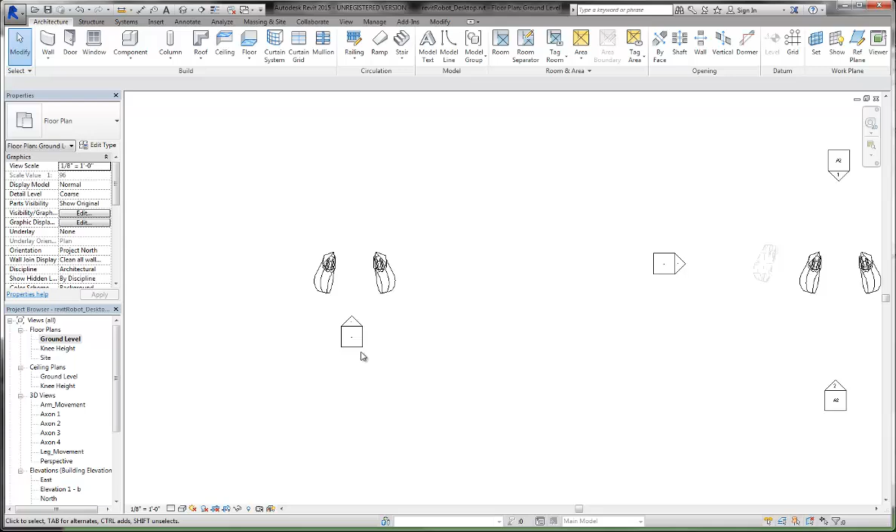Okay, so the first thing I'm going to show you is I dropped in and set up a new elevation view. The way that you do that is you just go to View, Elevation, create a new elevation, and then it'll enable you to come in here and just drop that in. And you'll automatically see that populate.

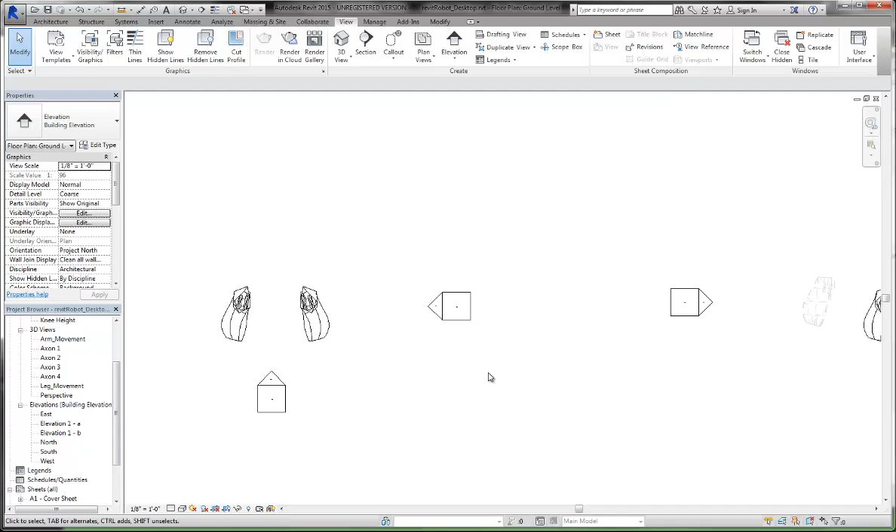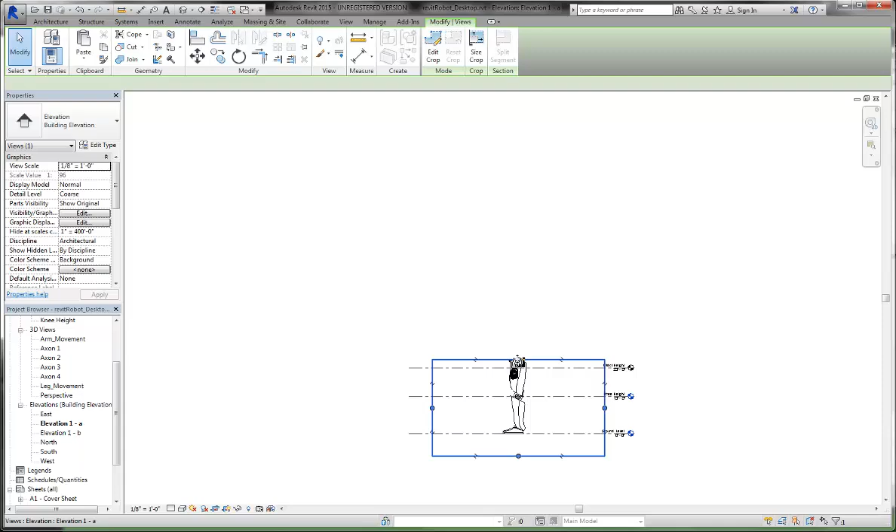If it doesn't give you the view that you want, if you select the square box, you can toggle on and off the views that you want with that check mark. So we come over here, we can double click. If I hit Control Tab to cycle back, you can see that the clipping plane on this doesn't actually show anything in the robot. And so if we come over here and double click, you can see that we see the robot here, and we can pull that up.

And I'll go through and set up our annotations here, and we're going to go ahead and actually dimension this out. Okay, so if I select this, I'm going to just pull these back so that way we can free this up for our dimensioning tools.

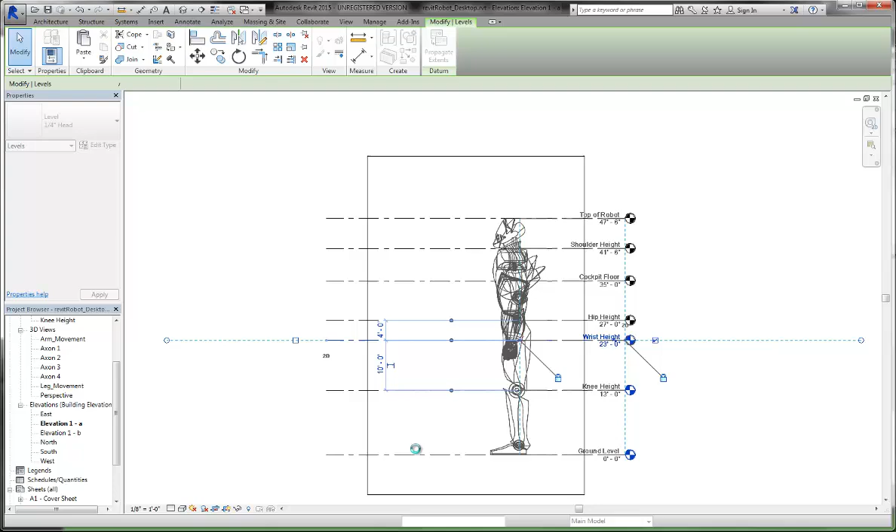Alright, so I've gone through and created levels. These guys are free and independent, so I just eyeballed this. You can see I'm close, but 47 feet 6 inches gets us in the range of where we want. We have the hip height, the wrist height, knee height. You guys can go through and annotate whatever you think is actually relevant to your particular robot here.

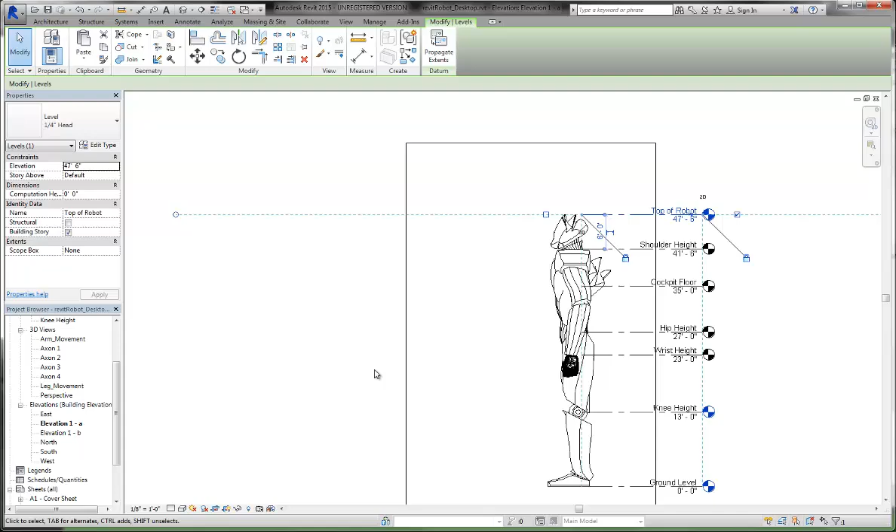So what we'll be able to do here is we'll be able to take some elevations, but then we're also going to do some annotations on this as well. So I'm going to go ahead and go in here. Because I have these reference guys, I can use my annotate aligned dimensions, and I'm going to dimension from the ground level to the top of the robot. And then from there, I'm going to dimension each one of these guys in between.

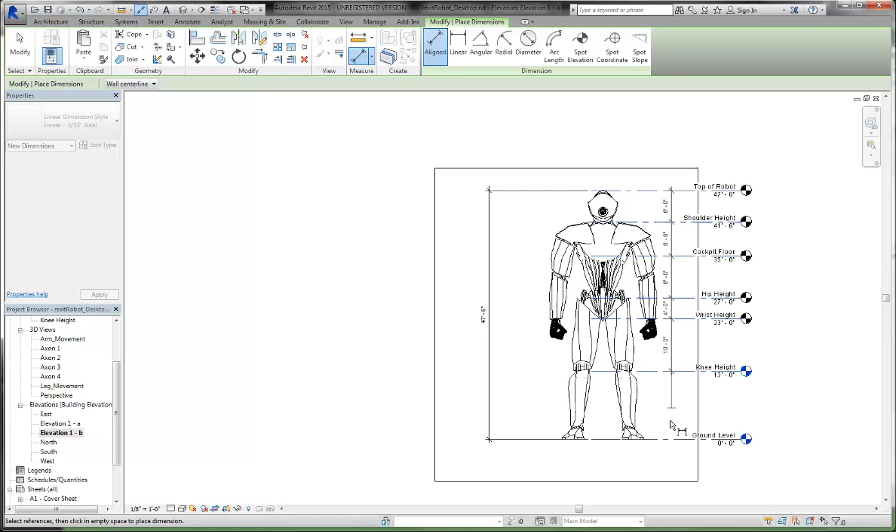This is going to be how you properly annotate and dimension out buildings. You always have the longest dimension and then any smaller dimensions nested inside that. Okay, so that'll give us a nice drawing. The other thing we want to do is we probably want to dimension the top.

And for that, we're going to misuse the grid tools. So I'm going to use a grid, and I'm just going to go ahead and drop that in. Click and then tab. And then if I select this in here, I'm going to toggle this switch on to create the number there, and then toggle this switch off. And then I'm going to go ahead and just set the shoulder width, and then use CO.

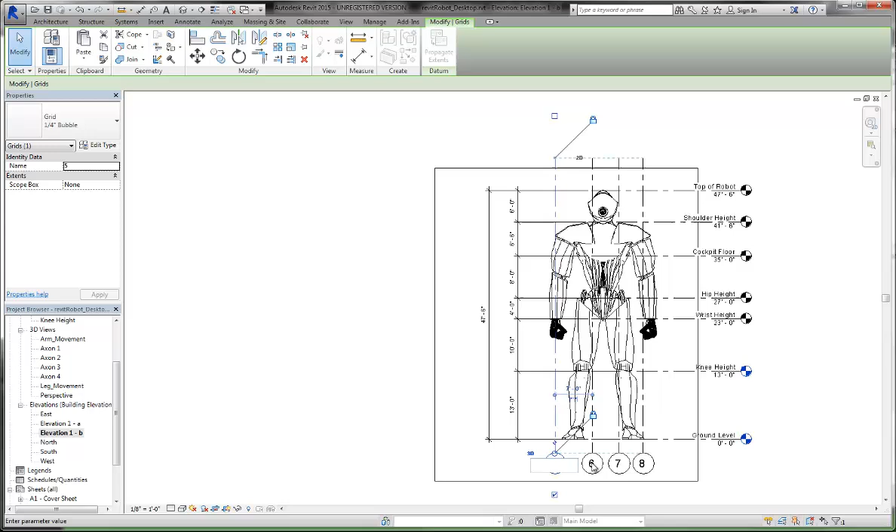CO, one, or we'll call this A, B — I'll just turn on caps lock so I don't have to shift — C, and D. Alright, and then we can come in here and drag those into the appropriate position.

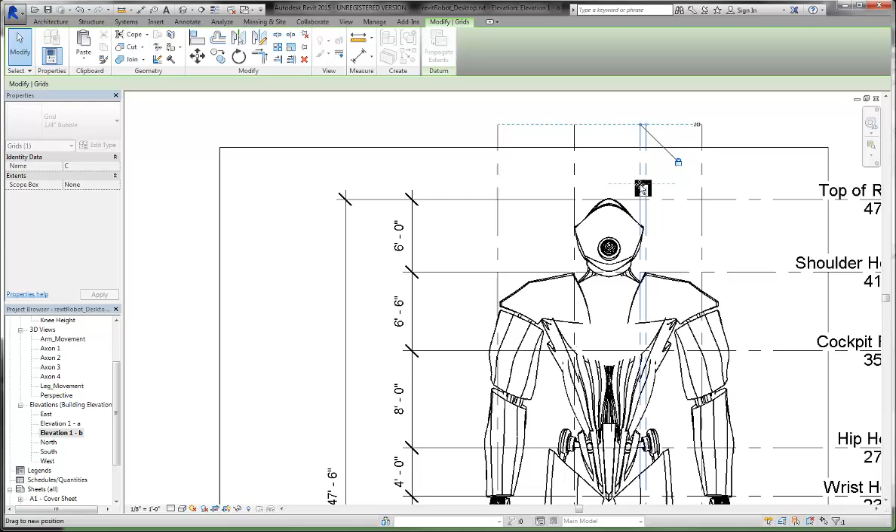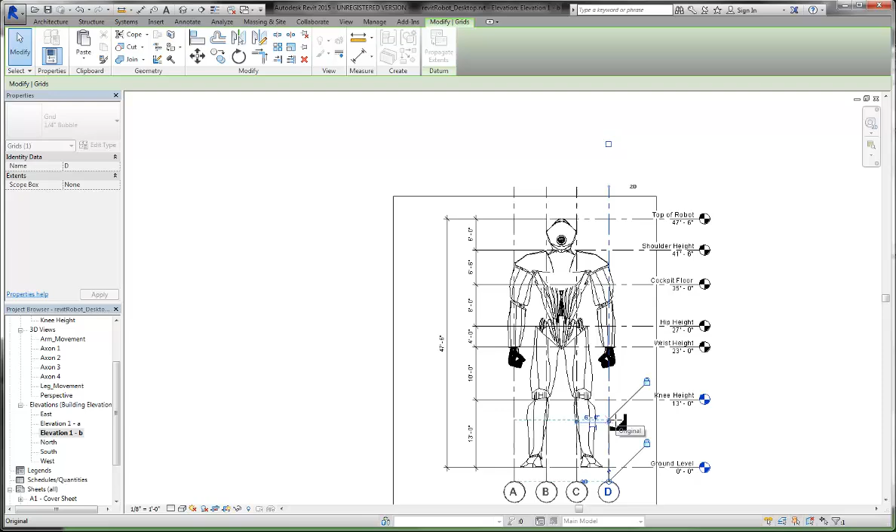Alright, if we select one of these, we should be able to edit how those projections work. This is what you'd use if you were developing a floor plan showing how these particular features would be rigged up, or if you were setting up a grid for a column grid or something like that. Then we're going to go ahead and also do an annotation aligned dimension.

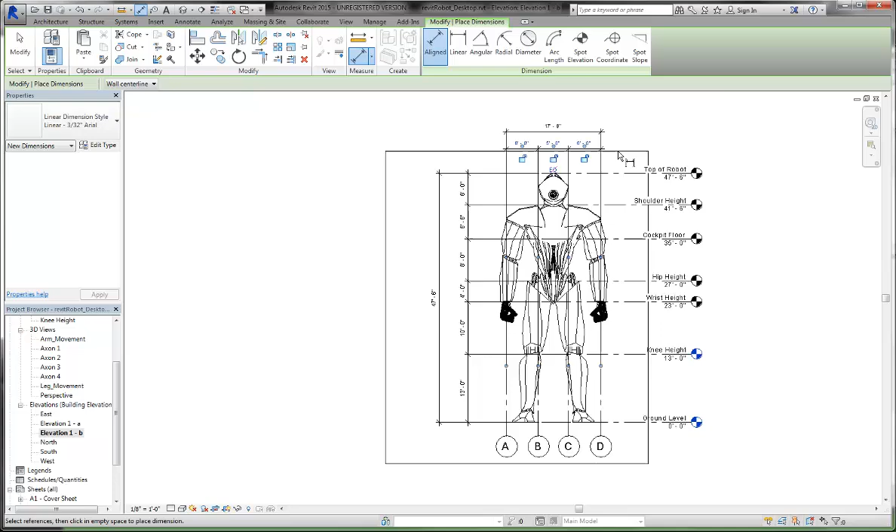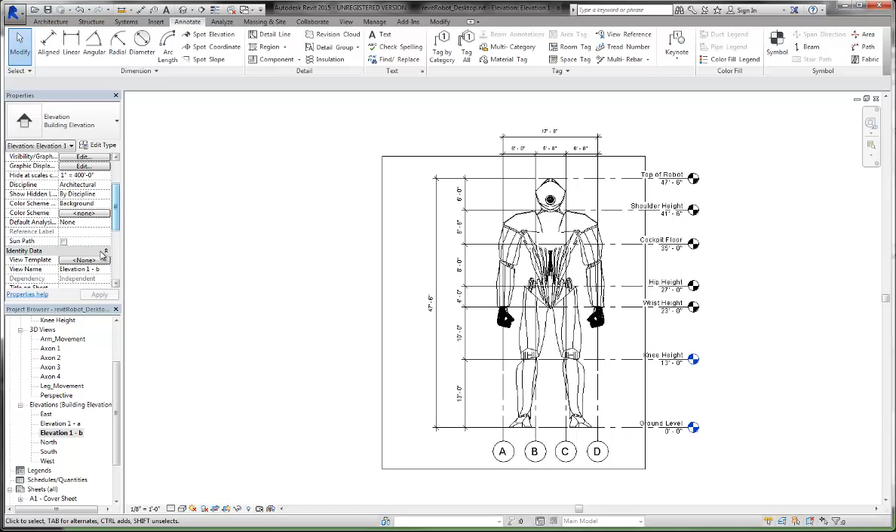Show the shoulder width. So that's how you guys are going to start to set up and dimension out your robot here. Now obviously we don't have any view templates set up for this, and that's making things look a little shabby, so let's go ahead and set up a view template for this guy so we can get these things to look nice.

Let's just see what this does. We apply. Okay, so basically an architectural elevation is the default. Let's go ahead and duplicate that. Robot, turn on caps lock now, robot elevations.

Okay, so we're going to go to annotations, and let's just select all the annotations. I'm going to set those to halftone. Model categories, let's see here. Links, walls, notes.

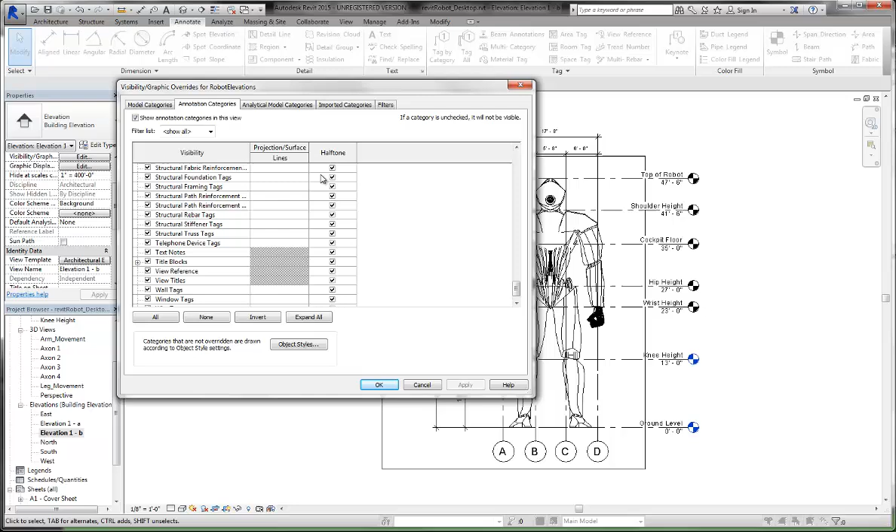I'm not sure why. Oh, okay, we apply that, there you go. Things will start to update, so we can start to see that punctuate itself. Let's go to model display, smooth lines, let's turn on the silhouette, let's go wide, apply. So that's going to beef up our drawing there.

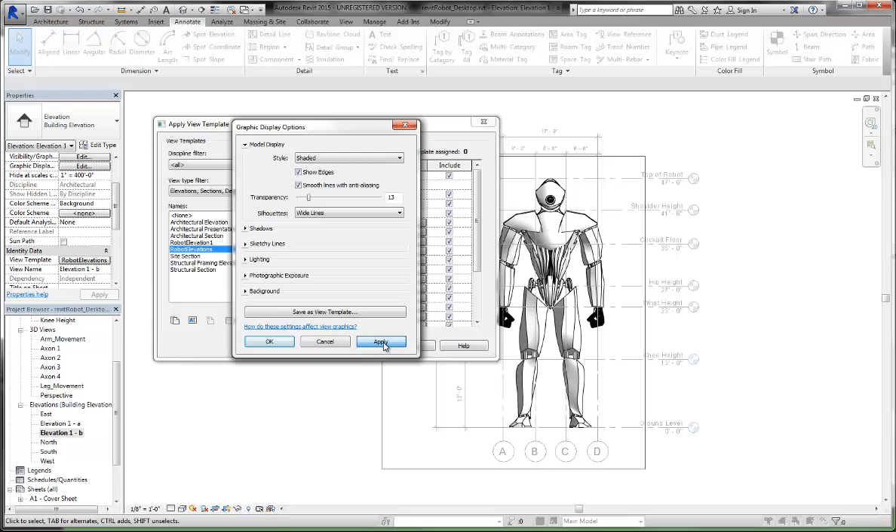Let's go ahead and shade this so we can see that, and I'm going to go ahead and just increase the transparency slightly so we can see through. Okay, I already did the anti-aliasing. Shadows, we can come in here - it doesn't look right, oh, because we're in elevation. So we'll go ahead and hit OK.

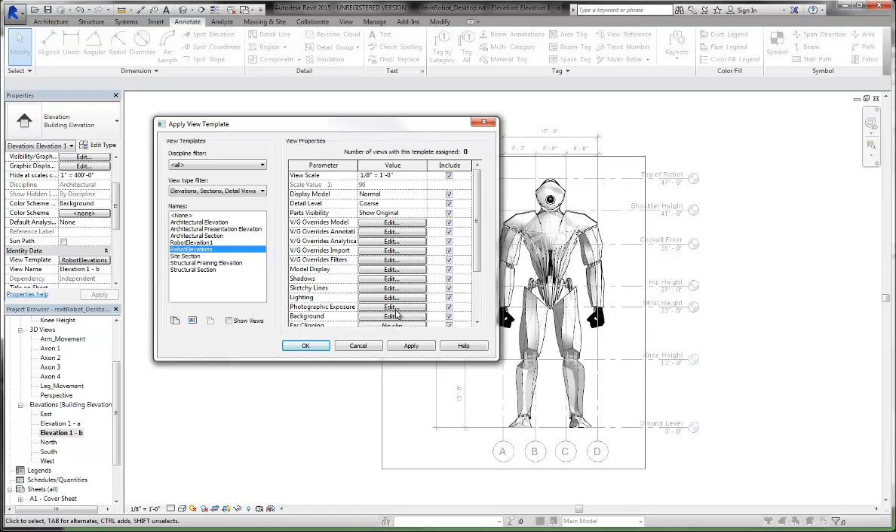Let's see here if I can think of anything else. Nope, I think that's it. So we go ahead and hit OK, and that will rig up our elevation. Then we can come down here and turn off the crop region view, so that would be a nice drawing for us to go ahead and place in.

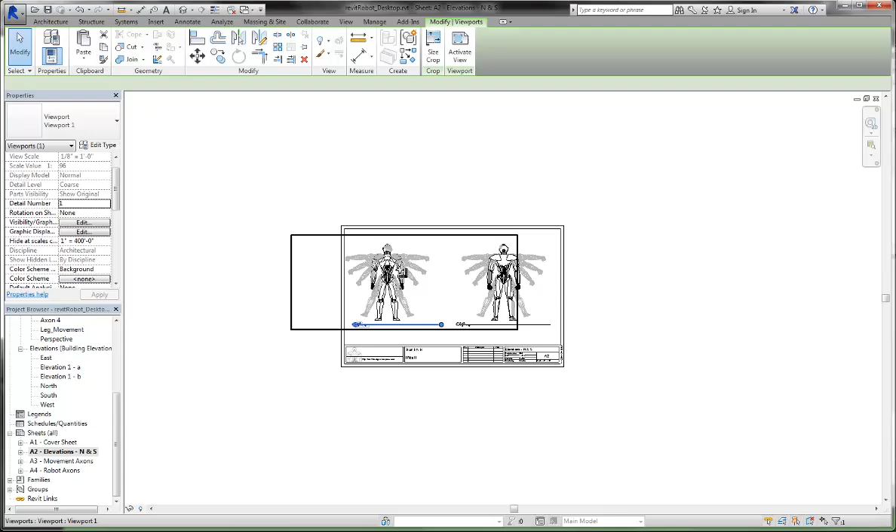So we have this drawing now, and I'm going to go ahead and just move this over, and I'm going to rename this. Vitruvian elevations, north and south.

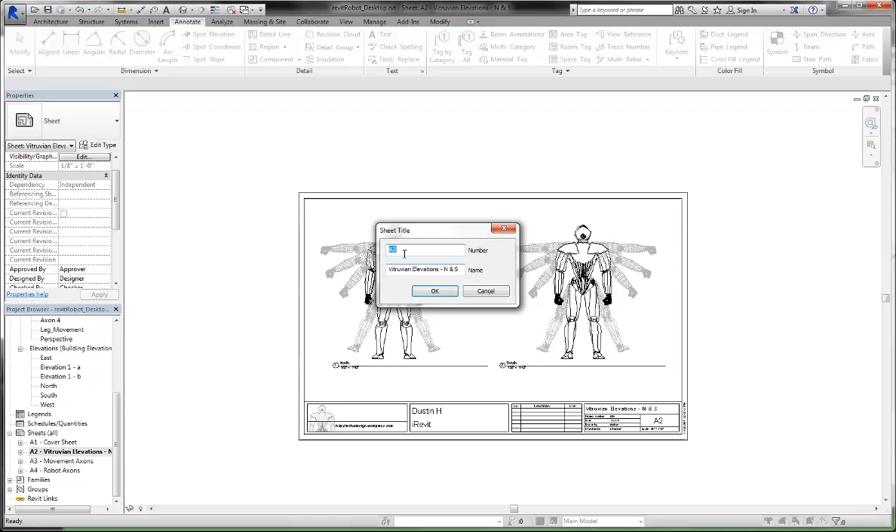Alright, and actually let's call this 2.2 sheet. Okay, let's rename this 2.1 elevations.

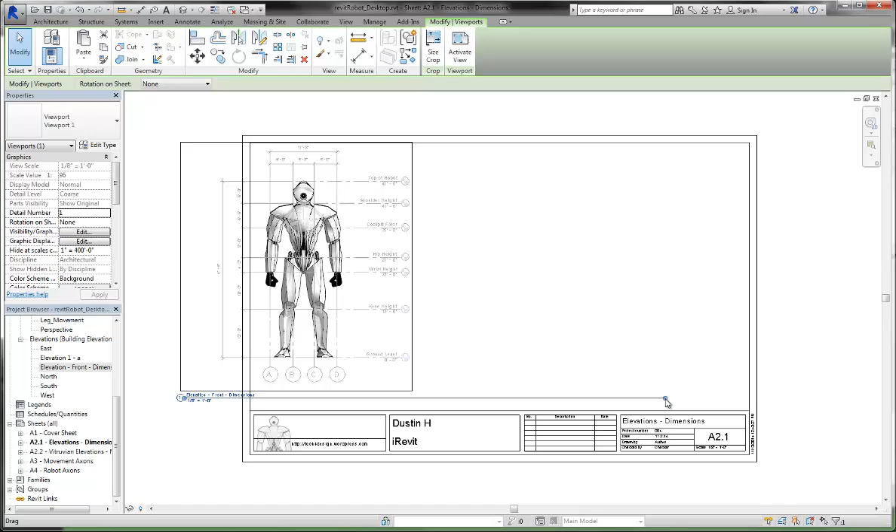So if we go over here now, let's rename this view. Alright, and then we can come over here and pull this over.

Alright, and let's do our other elevation here. Let's rename this elevation side.

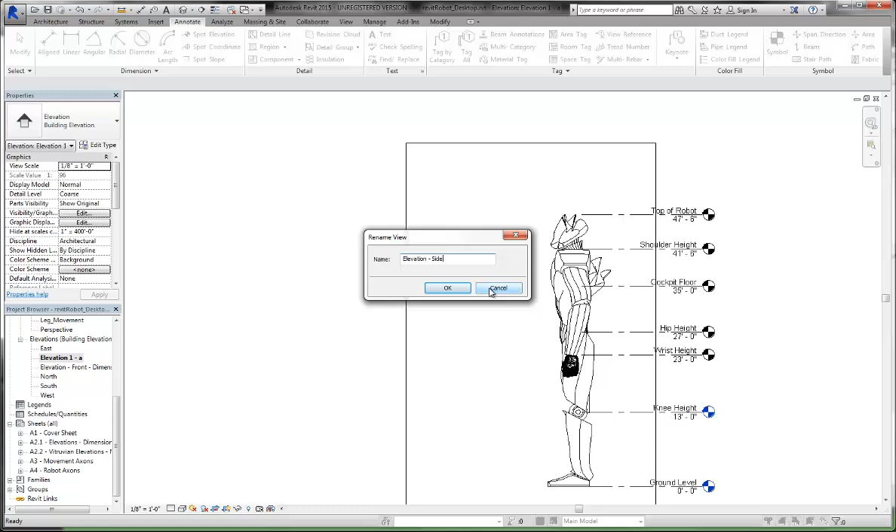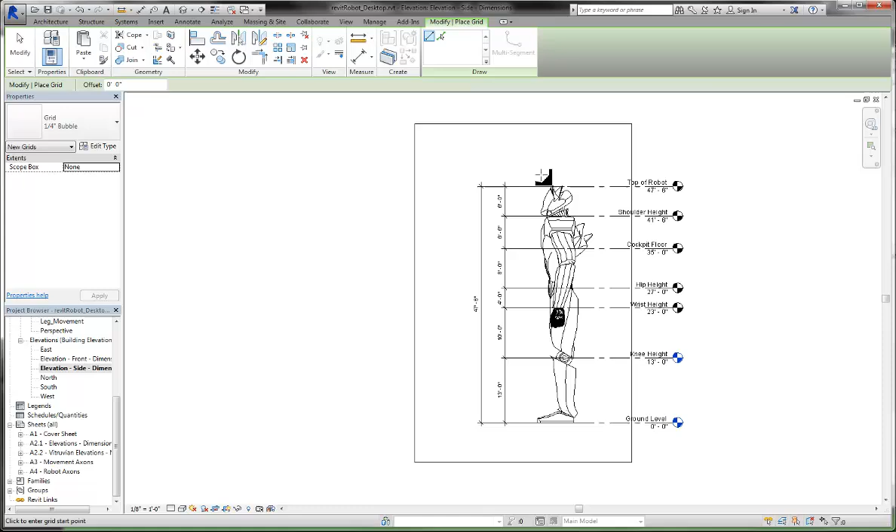Go ahead and just quickly do the same thing here. Okay, architecture grid. Pull that down. Since we used letters for the last one, I'm going to go ahead and use numbers for this, since it's going in the opposite direction of 2.

Okay, and we can go ahead and just do a quick... where is it? There it is. So things are in more places than one.

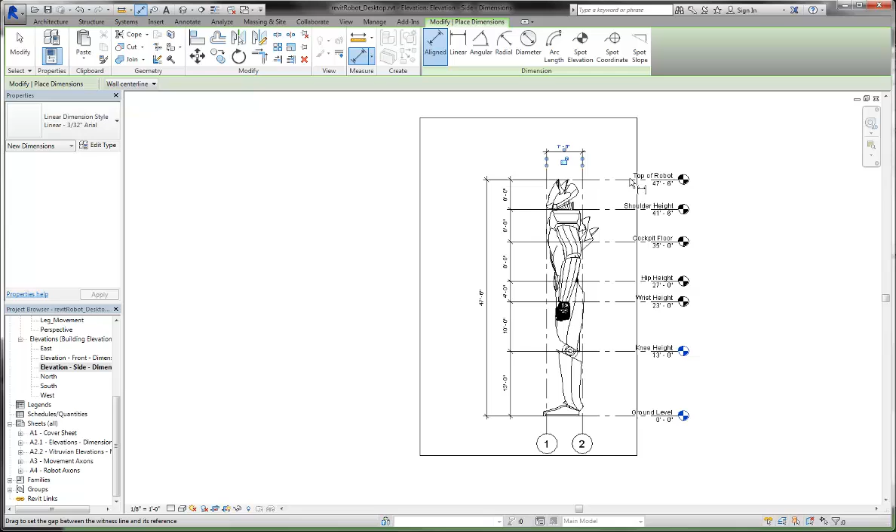Alright, and then since we already have our view template set up, just go ahead and hit apply, hit OK, and we should be able to just drop that on. It'll automatically try and center that. Select this, and we can turn off the crop region.

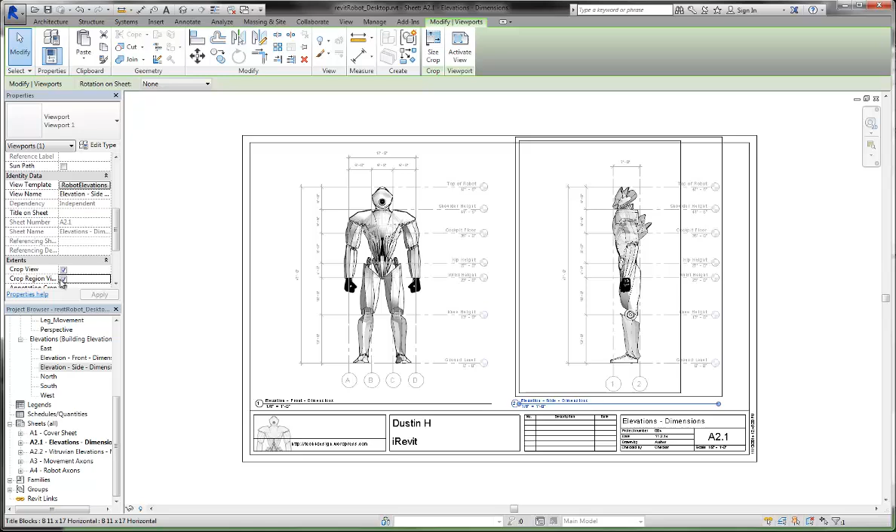Okay, that's how you guys are going to start to dimension this stuff out. Alrighty.